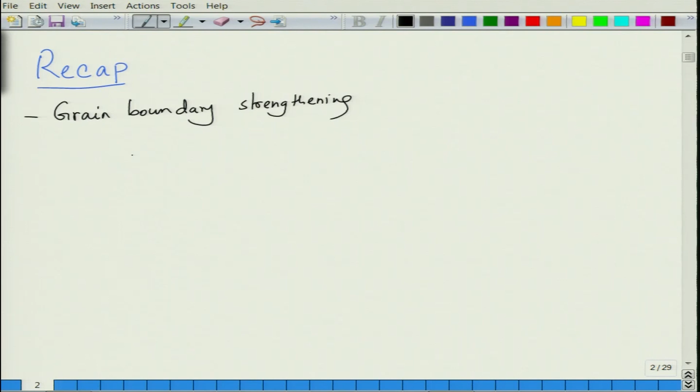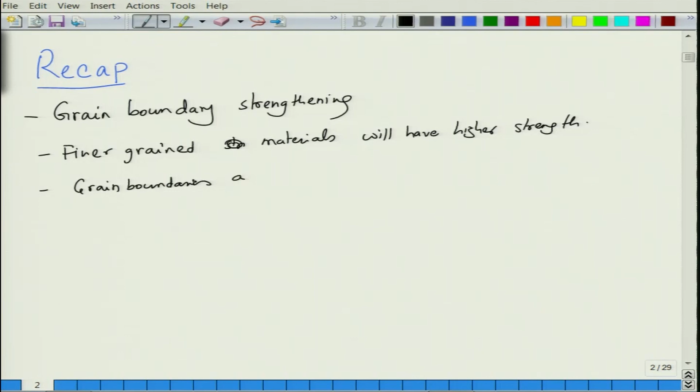In the last lecture we talked about grain boundary strengthening, in which we said that finer grained structures, finer grained materials or metals will have higher strength, and this is because of grain boundaries acting as barriers to dislocation motion.

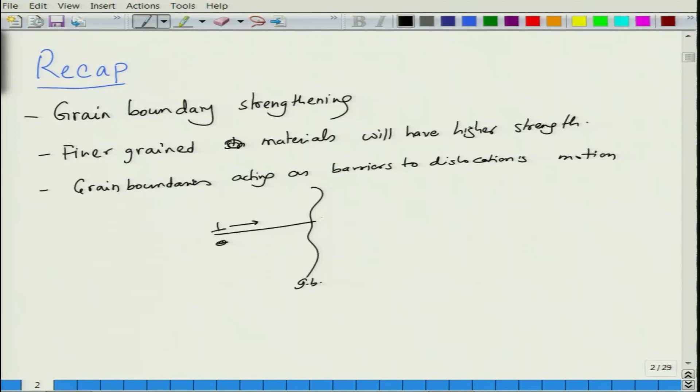This is because when you have a grain boundary, and if you have a dislocation moving on a slip plane, the dislocation does not find a continuous slip plane. So slip plane in this case could be like this. So dislocation does not find a slip plane, it has to go from there to there, and it does not happen because they are not continuous. As a result there is a discontinuity in the slip plane. Also, even though it was continuous, it could have been at a different angle, so that the resolved shear stress could have been different.

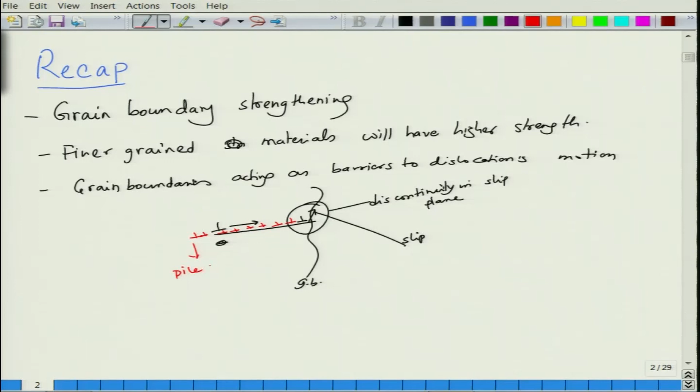Basically this leads to, if you keep doing it, a pile up of dislocations here like this. This pile up again leads to increase in the stress because you are piling up similar dislocations, so there will be repulsion between the dislocations as well, and this leads to strengthening.

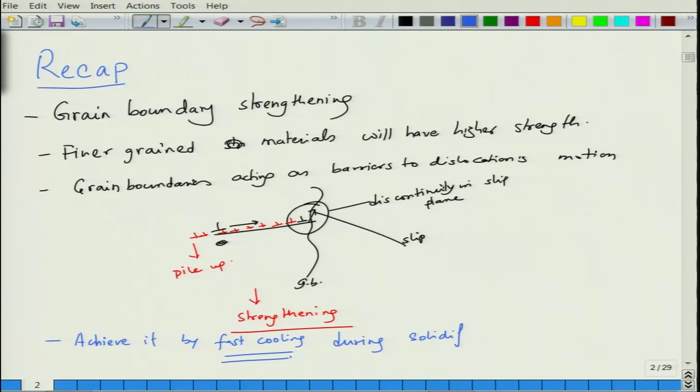So this is a simple way of carrying out strengthening in metals, and the way you achieve it is by fast cooling the materials. Fast cooling during heat treatment or solidification, or during thermal treatment, can lead to finer grained structure.

This is a very effective way of strengthening the materials, and you can also add things like grain refiners, which we did not discuss. Grain refiners are basically second, extra elements which are added to a molten material, and they basically increase the nucleation rate and decrease the growth rate, and they can also lead to finer grains. There are different kinds of grain refiners for different materials that you can find in literature.

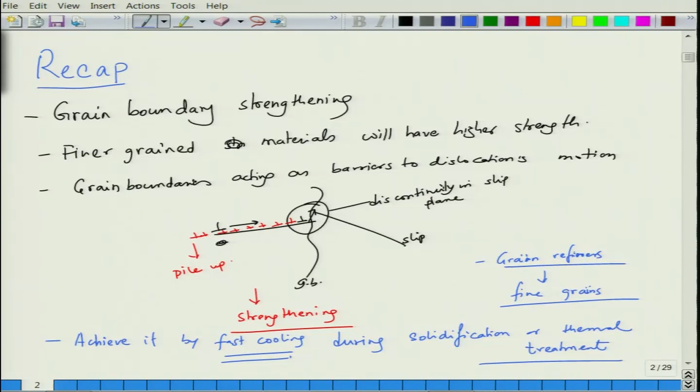Now the third method of strengthening is called solid solution strengthening.

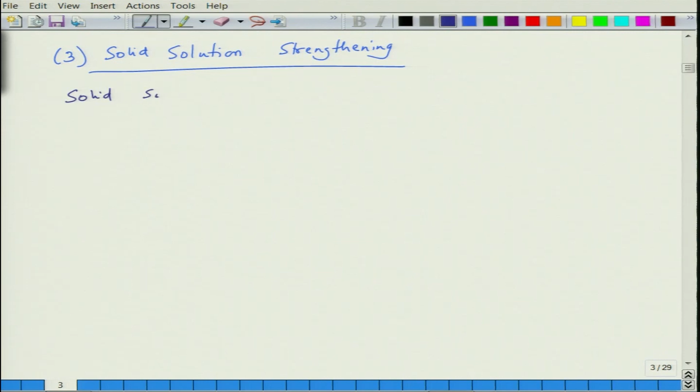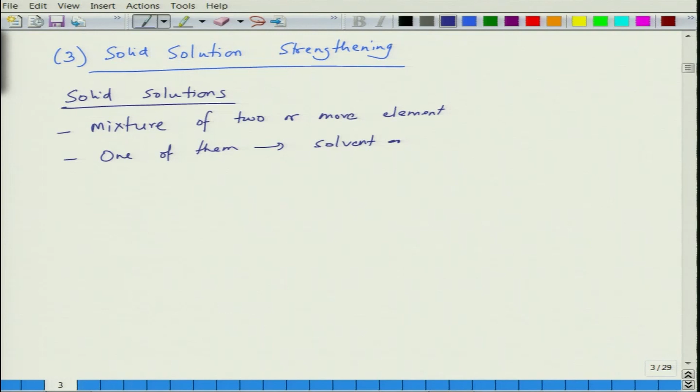Basically here what we do, so we know what solid solutions are. Solid solutions are a mixture of two or more elements, and generally one would be the base, one would be in larger concentration than the other. So one of them is the solvent or base - it is not liquid form, so solvent is not a very good term, let us say base matrix - and the other one could be the solute.

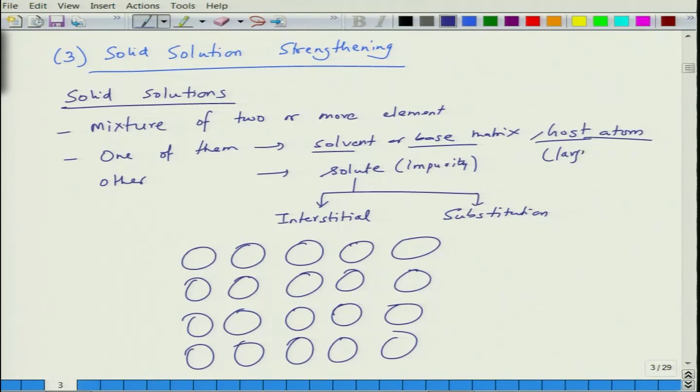The solute atom could be present, depending upon the size, as interstitial - basically this is an impurity - or it could be substitutional. So let us say if you have this kind of structure, these are the host atoms, in larger concentration generally.

Now in this host, these blue ones are host atoms. Let us say we have a red atom here which is the impurity, and if the size of the impurity is such that it cannot go into the interstitial sites, then it makes a substitutional impurity if it occupies the host atom site. On the other hand, if the impurity is small, it can go and sit in the interstitial site, so this could be an interstitial impurity.

So these two kinds of solutes will give you substitutional solid solution if the impurity atom occupies the host site, or interstitial solid solution if it is in one of the interstices. An example of substitutional solid solutions is copper zinc - roughly similar sizes, and they make a substitutional solid solution. Interstitial solid solution could be steel - you have carbon in iron, carbon is a smaller atom, it goes to interstitial sites in iron. So these are two examples of solid solutions.

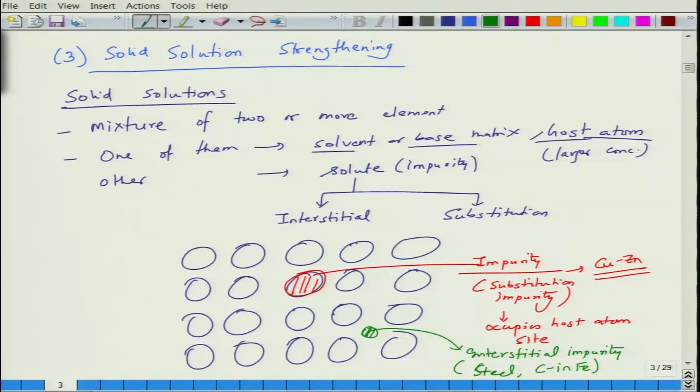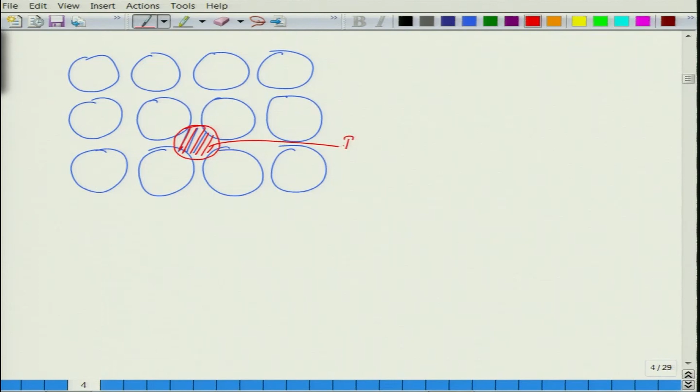Now what this does is, let us say you have a structure like this, these are host atoms. If I put an interstitial impurity which is slightly bigger than the size of the interstices, what it is going to do is displace these host atoms around it in order to be accommodated. So this is the impurity, and it displaces the host atoms around it. Basically the matrix was like this.

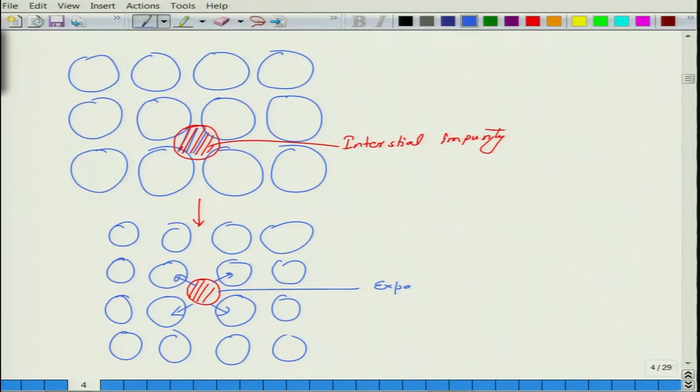So this basically leads to expansion of the lattice here, to accommodate a slightly larger interstitial.

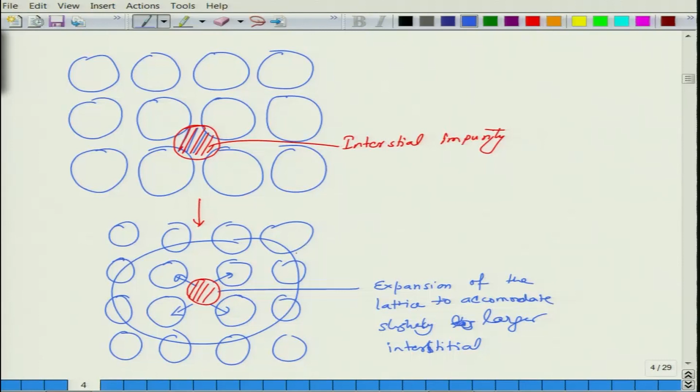This leads to local dilation, so as a result it is going to stretch. What it does is that it creates compressive stresses within this region to compensate as a counterbalance force. So basically it creates a distortion in the lattice, and this distortion leads to compressive stresses.

Similarly, it can happen in substitutional solid solutions also. If you have a bigger atom here, let us say this is a substitutional atom, it again pushes the neighboring atoms away, and again it creates what we call distortion. So it could be a bigger atom or a smaller atom, depending on the type of atoms, and it can lead to distortion of the lattice.

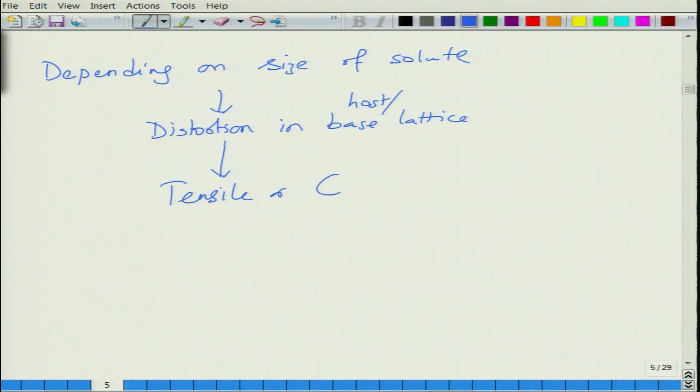So depending upon the size of the solute, you will have distortion in the base lattice or host lattice, and this gives rise to tensile or compressive stresses. So basically you strain the crystal.

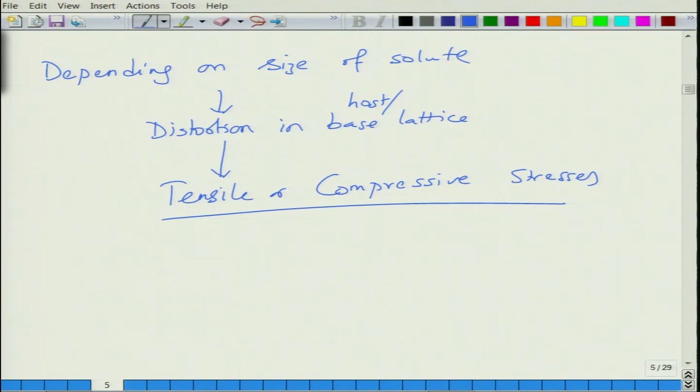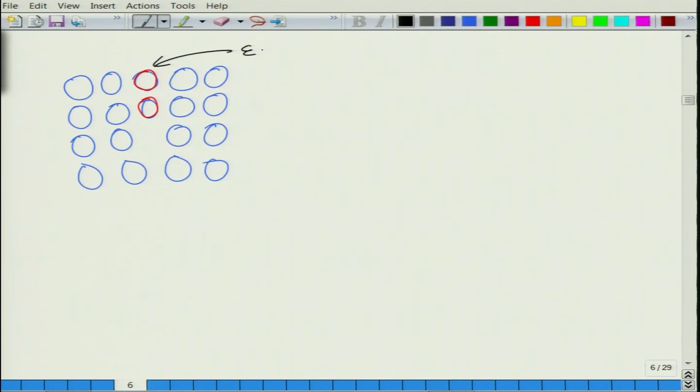Now how does it help with strengthening? Suppose you have a situation like this in which you had an extra row of atoms. So this is what we call an edge dislocation, and this is the slip plane.

So when you apply stress, it will try to move to the right to relieve the stress and get out of the crystal. Now let us say in the vicinity of this dislocation, when it moves, I put an impurity atom which is slightly different. We can see that this part of the crystal is under compressive stress and this part is under tensile stress.

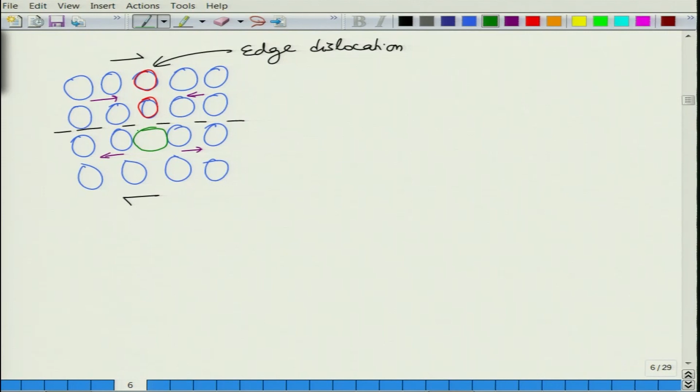So what I do is now put an impurity here which is bigger, so this is a bigger impurity, and the bigger impurity will dilate the lattice. If I do that, then the situation that might emerge is like this, and this is the bigger atom. So you can see now, earlier the top portion was under compressive stresses, and the bottom was under tensile stresses.

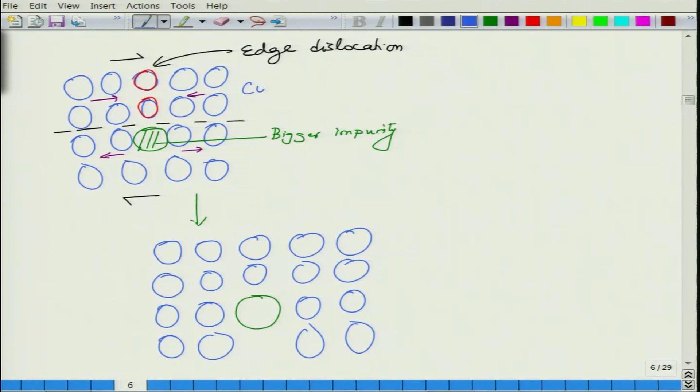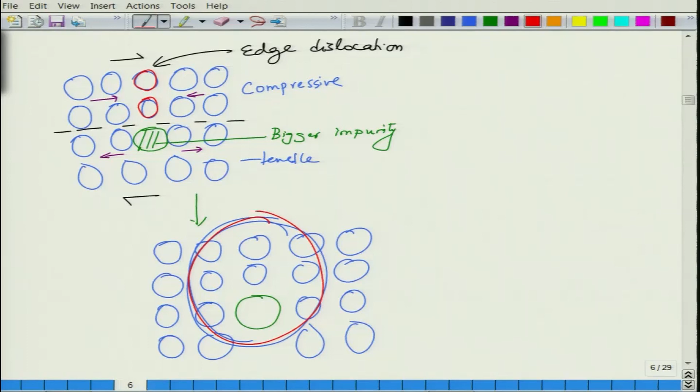So this is compressive and this is tensile. Now you have put this bigger atom, you have expanded the bottom part, so the stresses in the top and bottom counterbalance each other. So basically you can see that the dislocation has now become attached to the impurity, and this dislocation becomes more stable, because now it has become attached to this impurity because the stress field is reduced.

So because the presence of a solute nearby has a reduced stress field, as a result you require more stress to move it, because it has become attached to and stabilized by the presence of the impurity. So this is basically what we call solid solution strengthening, where the stress required to move the dislocation has increased because the impurity reduces the stress field around the dislocation by compensating the stresses.

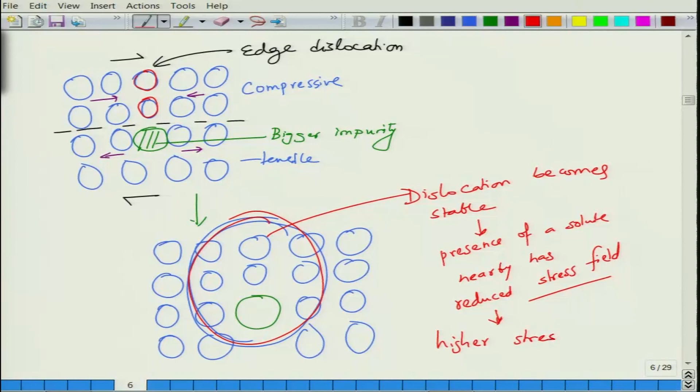So earlier you had tensile stresses, and when you put in this bigger impurity it introduces compressive stresses. As a result the stresses become lower, and hence the dislocation does not feel the need to move out of the crystal. So basically you require higher stress to move the dislocation further. This is called solid solution strengthening.

It can happen by way of both substitutional impurity atoms as well as interstitial impurity atoms. So basically this impurity not only does this, but it also brings another change, that is the change in the bonding environment, because earlier you had AA kind of bonds, and now this leads to AA and AB kind of bonds.

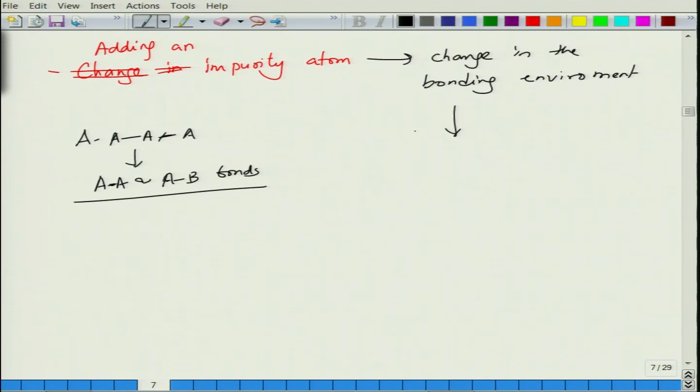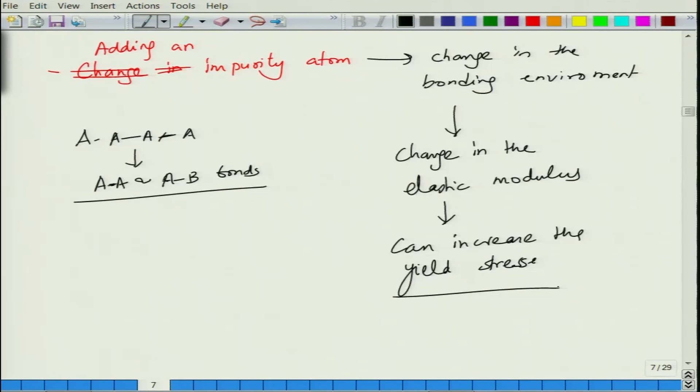And if AB bonds are stronger than AA bonds, then you will have a change in the elastic modulus, and this again can increase the yield stress. So, impurity atoms, another factor is their concentration.

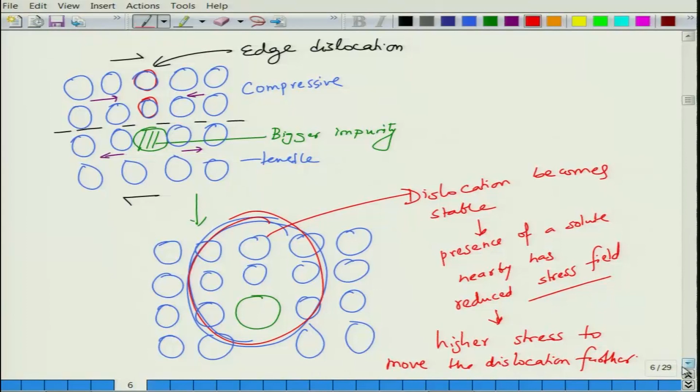So, when you add, not all the concentration will work, it may happen that the effect is valid only up to a certain concentration. So, there is a critical concentration up to which the effect will be valid. So, basically what we are saying is that addition of impurity atoms, substitution or interstitial impurity, can stabilize a dislocation by compensating the stress fields, making the dislocation more stable, and hence you will require larger stress to move depending upon its size, of course.

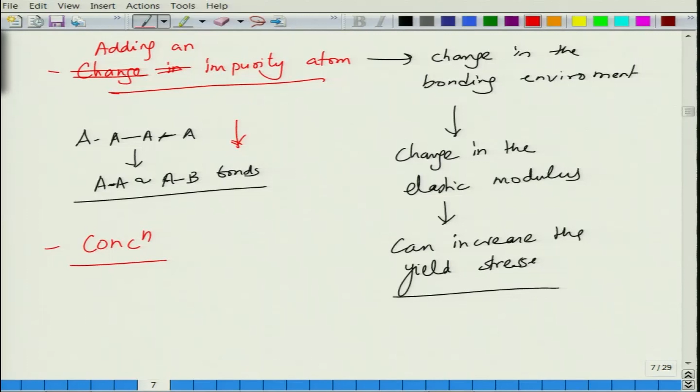Then adding an impurity atom also causes a change in the bonding environment from AA to AB kind of bonds, and if the AB bonds are stronger than AA bonds, then the elastic modulus will change, then you can change the yield stress, and of course it depends how much you add. So how much you add the solute atom to the host. So basically there are people who have studied this.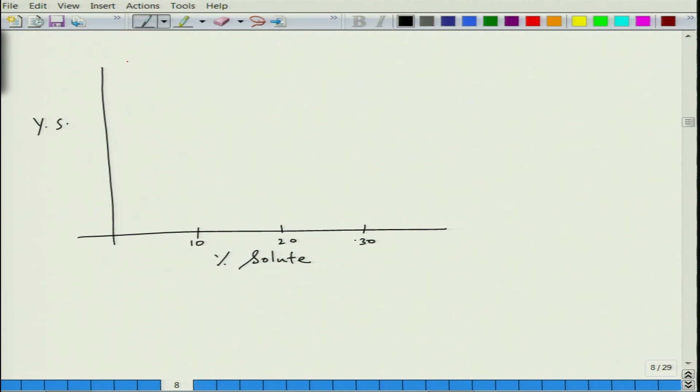So if you plot, for example, yield strength as a function of percentage solute addition, let us say this is 10, 20 and 30, and this is atom percent. Okay. So let us say this is 50, 100, 150 and 200, this is in MPa, megapascal. So here the base matrix is copper, and copper has a radius of 1.28 angstrom.

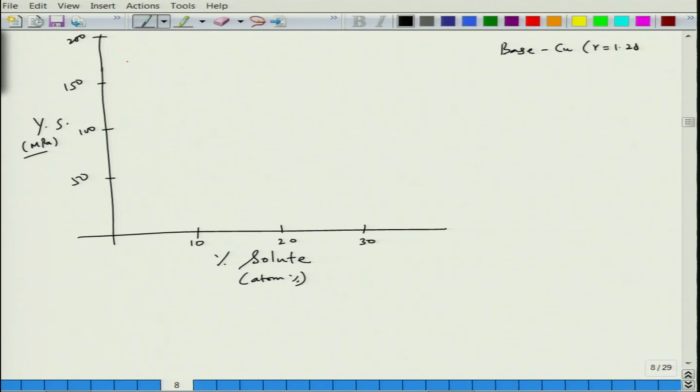So in case of copper, if you look at zinc, zinc creates some strengthening up to about 30%, and zinc is about 1.31 angstrom. Okay, so zinc has a certain solid solution strengthening effect. If you look at nickel to copper, nickel to copper is a very good example. Nickel to copper can lead to higher effects. So it can increase the values up to about, so nickel to copper will be somewhere here. So this is nickel, and nickel size, R nickel, is 1.25 angstrom, very similar to copper.

In fact, they make a nice substitution solid solution which is an isomorphous system. So it remains FCC all the way, whereas copper with zinc makes brass. So it has limited solid solubility. After this it forms second phases and so on and so forth.

And then we have silicon. You can also add silicon to copper, and silicon to copper will have a certain solid solubility. Silicon is about 1.18 angstrom. Then we have beryllium. So you have beryllium bronze where you add beryllium to it. So beryllium is about 1.12 angstrom,

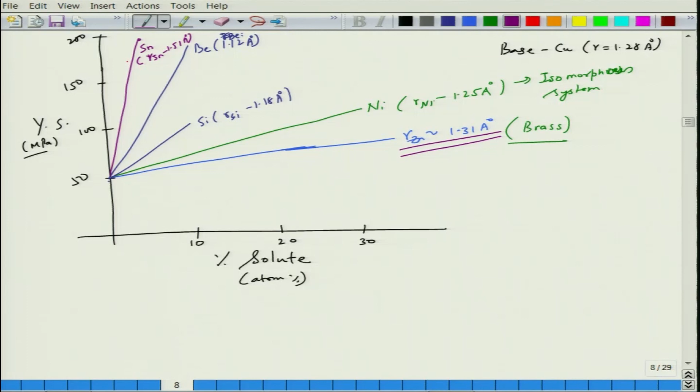You can add beryllium which can increase the strength again to more than 150 megapascals, for small amounts, about 10%, and then tin, you do not have to add even 10%, tin goes all the way up to about 170, 180, maybe 200 megapascals. So these are the effects of adding solute atoms to, for example, copper, which leads to a substantial amount of strengthening in copper. So this is a fantastic way of strengthening, and that is how a lot of these materials can be strengthened. You can strengthen by grain boundary strengthening, you can strengthen by work hardening, but you can also strengthen them by adding these foreign atoms. So basically you add solute atoms.

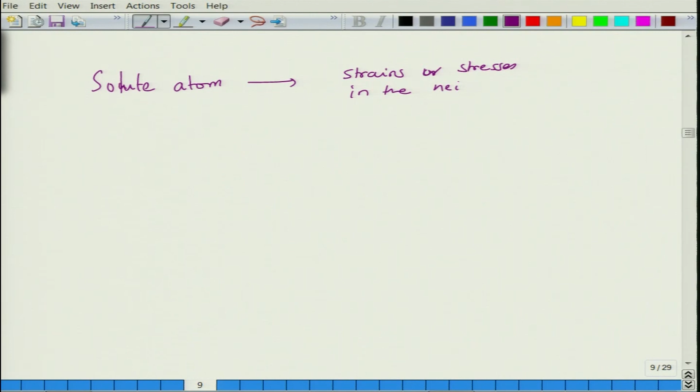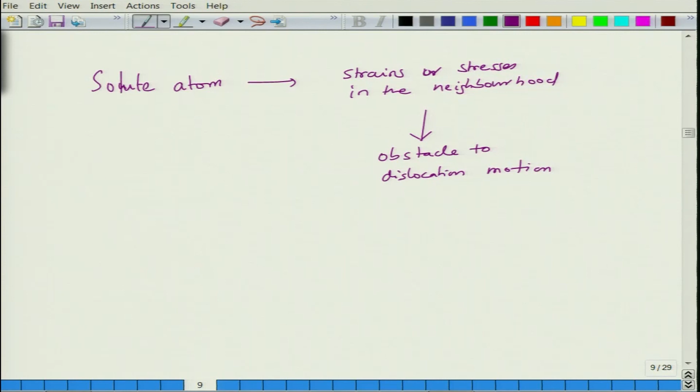In summary, solute atoms create strains, or you can say stresses, in the neighborhood, and this can act as an obstacle to dislocation motion, because a dislocation may get stabilized by coming there, and as a result you make a stronger crystal.

So, this is why alloys are generally stronger than pure metals. For example, pure gold is very soft. That is why you can't have jewelry made of pure gold. It's never 24 karat. If gold is very soft, all the jewelry will deform itself very easily.

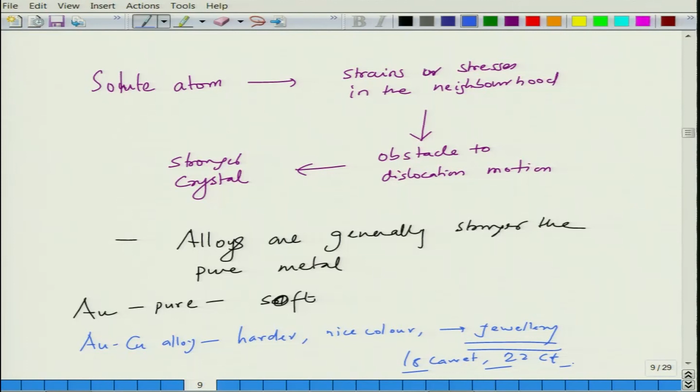So, you add a bit of copper. So, an AuCu alloy is harder. It also provides a nice color to it, and this is what is used for jewelry. So, you have 18 karat, you can have 22 karat, and so on and so forth. This is because of the addition of copper to gold, and this is true for every alloy.

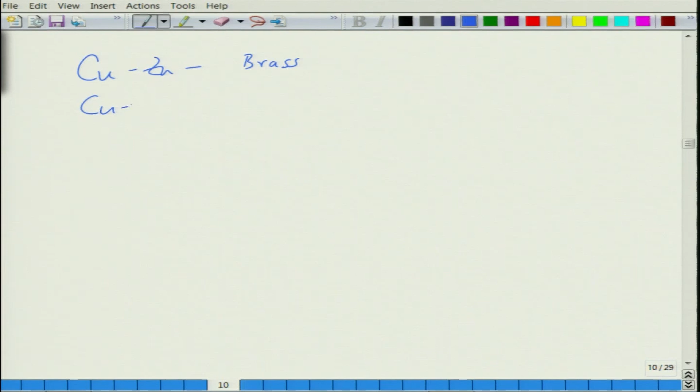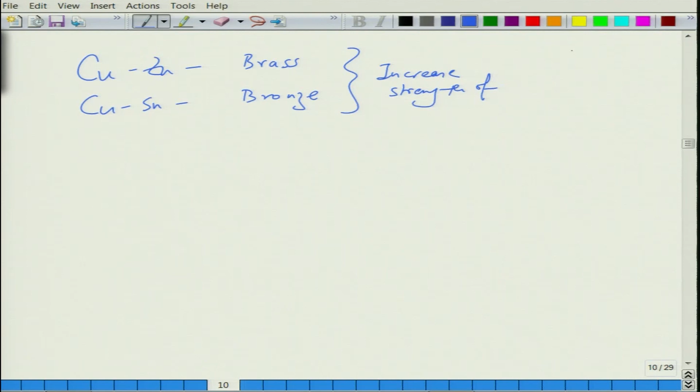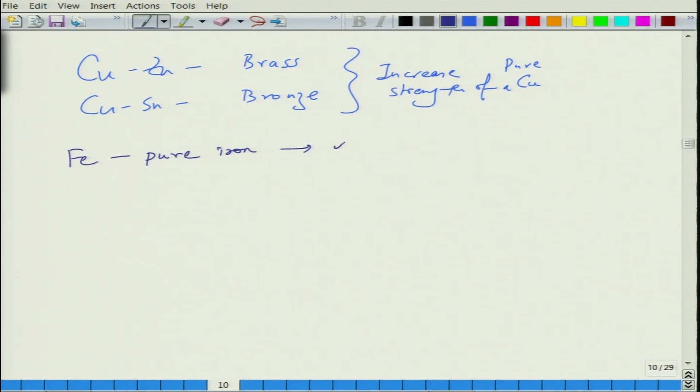So, you have copper zinc, which is brass, copper tin, which is bronze. These basically increase the strength of pure copper. Similarly, pure iron is very soft, but if you add carbon to iron, less than 2% of carbon makes steel, which is very strong.

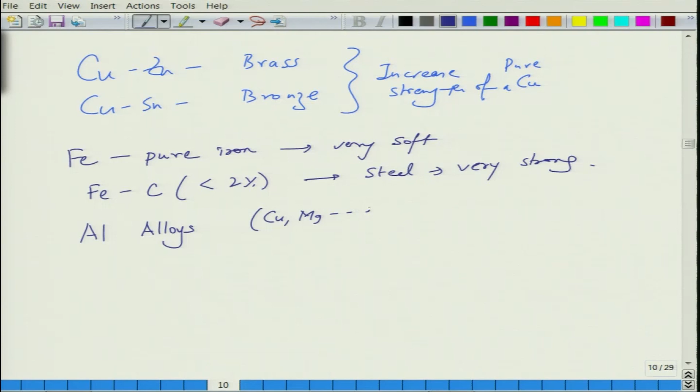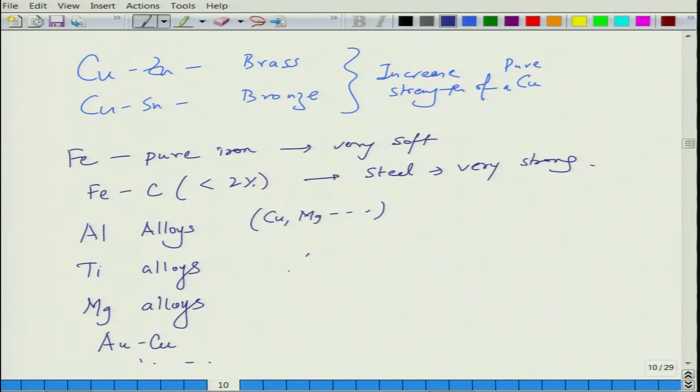This is also true for, let us say, aluminum alloys. Aluminum can have copper, it can have magnesium, other elements as well. Similarly, you can have titanium alloys, magnesium alloys. These are all engineering alloys. We saw gold, AuCu, and so on. Essentially, addition of a smaller amount of impurity atoms to metals leads to an increase in the strength of these metals, making them stronger and useful for engineering applications, because things like aluminum and magnesium in the pure form are very soft. So, they are not extremely useful for a lot of these engineering applications. However, when you add these impurity atoms, they become harder.

So, what we have said is, if you just summarize it now, addition of impurity atoms causes strengthening. This could be because of interaction of the stress field caused by them with those of dislocations. So, this is the first mechanism, making it harder for dislocations to move.

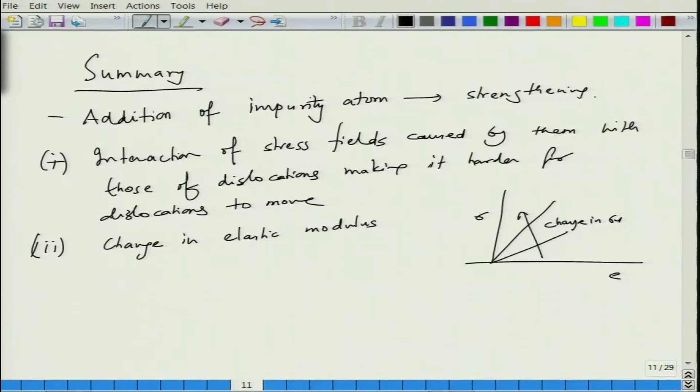Second mechanism, as we said, is a change in elastic modulus. So, in the first case the modulus could be like this, and in the other case the modulus could be like this. So, this is sigma E. So, this is the change in sigma Y. So, change in E causes the change in sigma Y. This is another way of increasing the strength of these materials, and this is something which is done in the engineering industry on a routine basis, where we add these alloying elements to make the materials stronger.

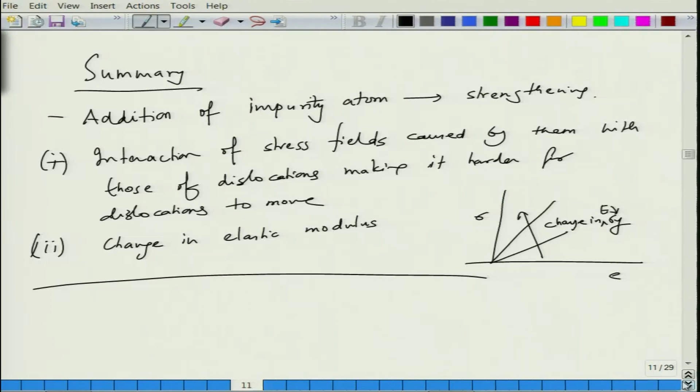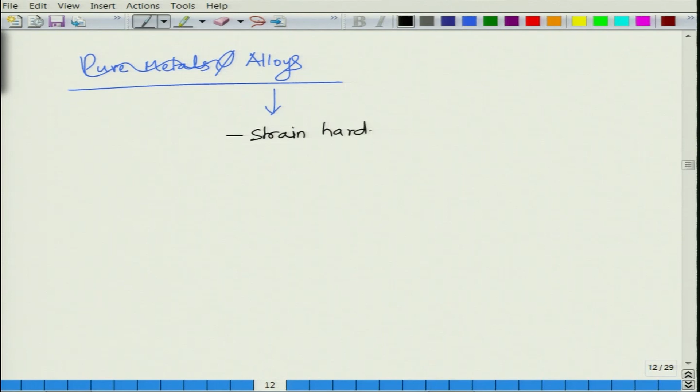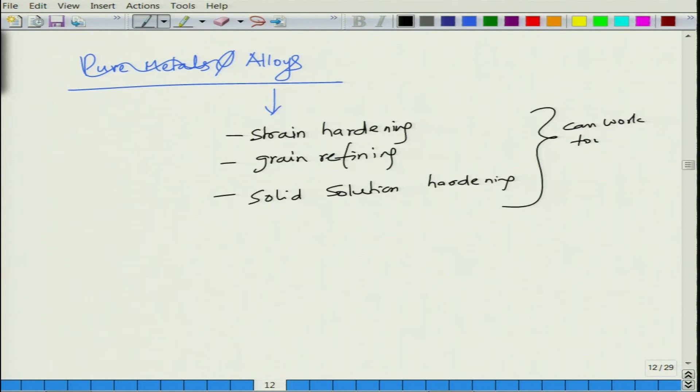Now, the next thing that we are going to study is, however, let me just say, if you do not form second phases, so let us say pure metals, and let us say we talk about alloys. In alloys we can do strain hardening, we can do grain refining, and we can do solid solution hardening, and all these three mechanisms can work together or individually. So, depending upon how much improvement you want, you can employ all three of them and make the materials stronger, or you can use either one of them to make the material stronger without forming a second phase.

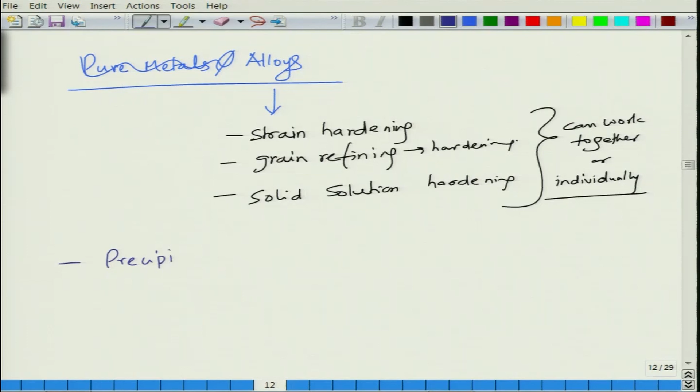Now, the last category that we will look at is precipitation strengthening. So, precipitation strengthening is basically addition of impurity, addition of solute atoms to form a second phase which is stronger, and this causes a hardening or a strengthening, and this is what we will look at in the next lecture.

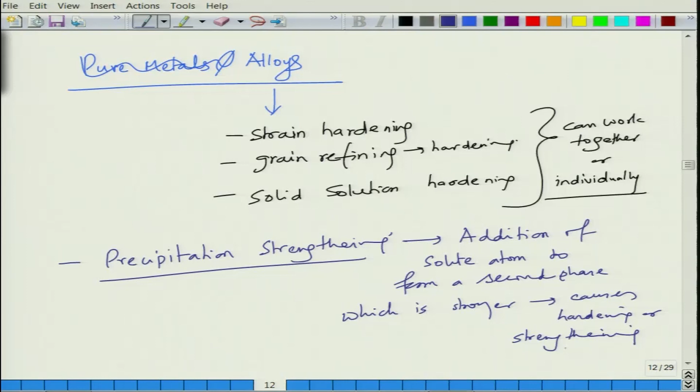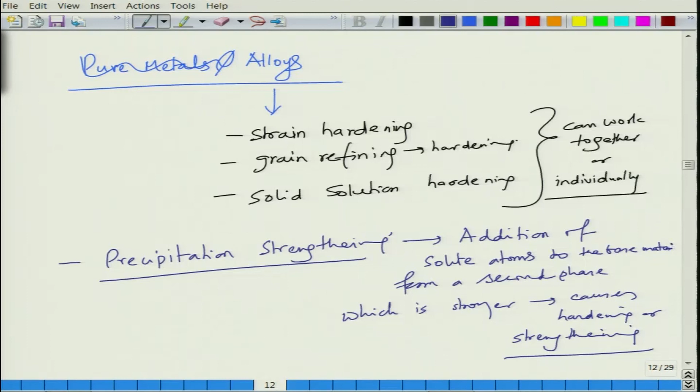In the next lecture, that is going to be the last lecture on mechanical behavior of materials, we will look at precipitation strengthening, where addition of solute atoms to the base lattice, to the base material, will form a second phase, and depending upon how you form the second phase, if the second phase is harder, it can cause strengthening of materials. That is the last part, we will see that in the next lecture. This is very common for aluminum copper alloys, aluminum magnesium alloys, steel even.